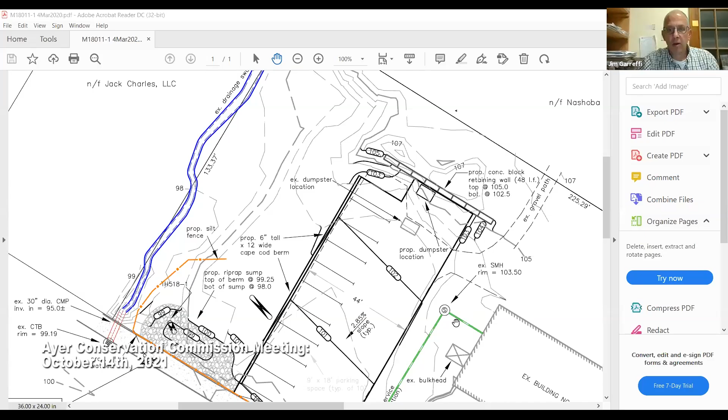Share, okay, so can you see the plan? Yep, great. So this is the little brick building down on Central Ave, our office building.

And we have this gravel parking lot on the other side of us that is just horrible as far as trying to maintain in the wintertime. There's a big pile of dirt behind our dumpster, it's all the dirt we've ever put on that parking lot to try to level it out. Every winter it gets plowed up and put in the back. The other reason is we get puddles in areas, the trees are shading over the parking lot, we're trying to make a safer parking lot. And right now, when it rains, the water ends up right down on the road here, so we're trying to accomplish a whole bunch of things.

One is we'd like to pave the lot so we could treat it better, plow it more efficiently. And then hopefully try to take some of the water that's running off our current parking lot into the road and get it into this little dip area here, so anything in it may be able to settle out before it gets to the catch basin. Right now the water comes down, goes along the curb and ends up in that catch basin. What we're trying to do is give it a place to go before that, to minimize some of the issue on the road, any of the dirt or whatever's coming off our road too. So that's really what we're trying to do, pave our existing parking lot.

And also, you're going to create that little retention area? Yeah, that would be part of this, putting this parking lot in there would create this little riprap retention area. It's about a foot deep.

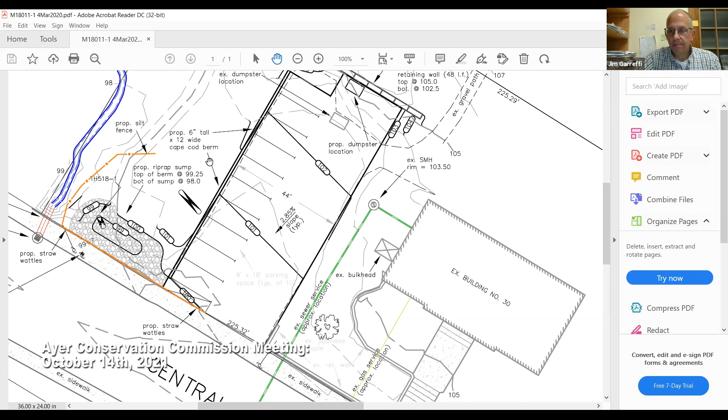And where on here are the buffer zones? The intermittent stream is shown in blue to the left, and I scaled it out today. It's just about exactly 50 feet from the intermittent stream to the left-hand edge of the proposed parking lot. And the proposed parking lot is about 50 feet wide, so the 100-foot buffer is just about at the right-hand edge of the proposed parking lot.

So that riprap area is going to be well within the 50. Yes. Okay.

Again, one of our thoughts, and it was certainly open to discussion, is that right now all that water runs from the parking lot right into the catch basin, it comes right down that gutter line. We figured having this area here might actually be able to provide some settling before it hits the brook.

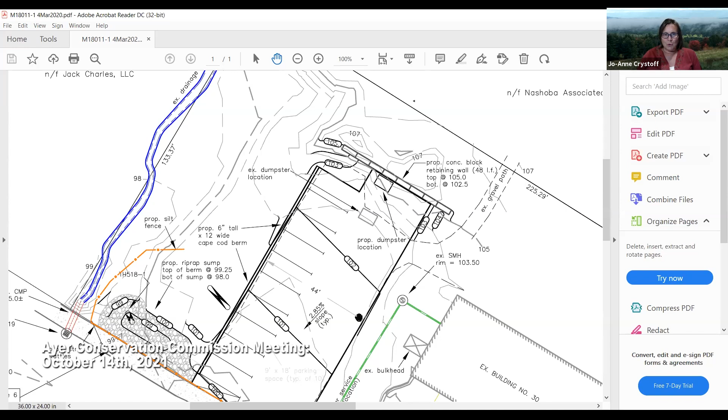I did talk to the town planner about this today because the Conservation Commission is not the stormwater authority in Ayer, the planning board is. Mark is going to have to go through the new updated stormwater regulations to see if this might need a site plan. He wasn't sure, but he's got a copy of this plan now.

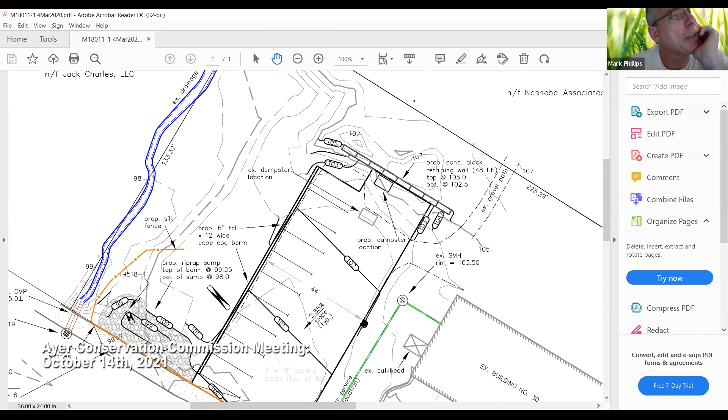You may have to do a concurrent sort of thing with the planning board, depending on what he decides. Jim, regarding the pitch of the whole parking lot on your plan, is the expectation that it's going to be coming towards the road but at the same time pitched down towards that riprap area you're proposing, or is only a portion of the parking lot planned to be pitched that way?

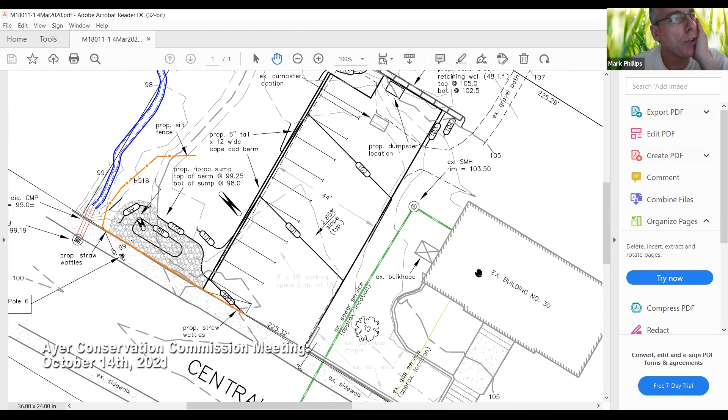I guess going forward I assume, Jon, you're probably going to want to do a site visit on this too. But Jim, if you could be sure to change the designation of the intermittent stream to actually say intermittent stream, that would be much appreciated.

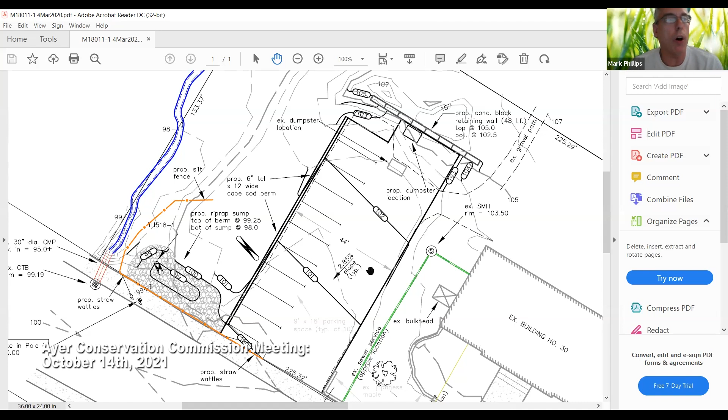And right now it is basically gravel and dirt, if I remember correctly. Yes, correct. Do you have a lot of runoff now, or is it percolating down through that generally? Is it only when we have a heavy deluge of water that it's actually streaming down? When we have enough water that the puddles form, since it's not as level as we'd like anymore, as those puddles fill, it runs right down into the street. It's pitched that way.

Can you tell me, Jim, in the back where it has that proposed concrete block retaining wall, it's less than 4 feet here, right? Yeah, is that 3 feet-ish? Yeah, about 2.5 feet top to bottom. So from here to here would be 2.5 feet, and the grade goes up behind it.

Right now the dumpster's about here and it's in the way of some of the parking, so the plan is to cut that back and get the dumpster out of the parking lot.

Any other questions or comments from commissioners? From anyone viewing or listening?

Jim, we have a couple of site walks set up for next Tuesday. Would that be possible for you and the commissioners involved? What time did you set that up? About 5:45 - is that going to be getting dark? Not yet, no. So Tuesday's at 5:45? Would that work, on the 19th? Yep, okay, that'd probably be fine.

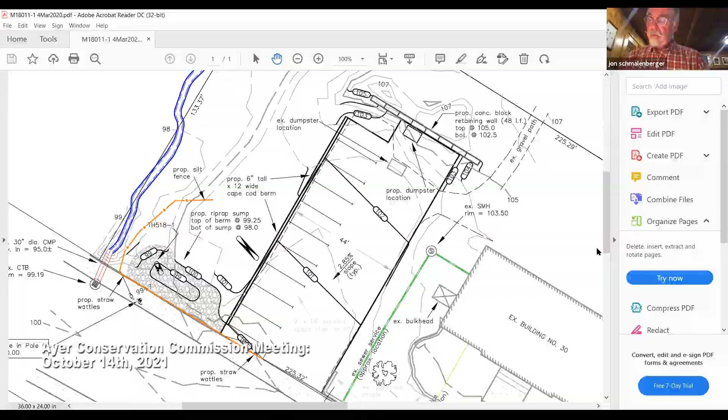Next item this evening is a public meeting that we will open under the Wetlands Protection Act and the Ayer Wetlands Bylaw. It is a conservation analysis of Stratton Hill. No, we amended the agenda - we're just going to open and continue. Well, it's just a public meeting, so it's just postponed. Okie dokie, let that one go.

Our next item this evening is a public hearing that we will open under the Wetlands Protection Act and under the Ayer Wetlands Bylaw. It is a notice of intent at 0 Washington Street, Lot A, DEP file number 100-0461.

How are you, Joe? Fine, thank you. Good, good.

Have you received the orders of conditions for Lot A? We got the drafts, Joe, and made some comments on those. Yes, we got those. I apologize, I misunderstood.

And you had time to review those? Yes. Any comments or questions? We provided Jo-Anne with some comments. One or two things were typographic in nature. The form didn't seem to be populating the file number up in the upper box, the DEP form, and there was a couple of other language items, but pretty minor stuff on balance. I don't know if Jo-Anne had an opportunity to

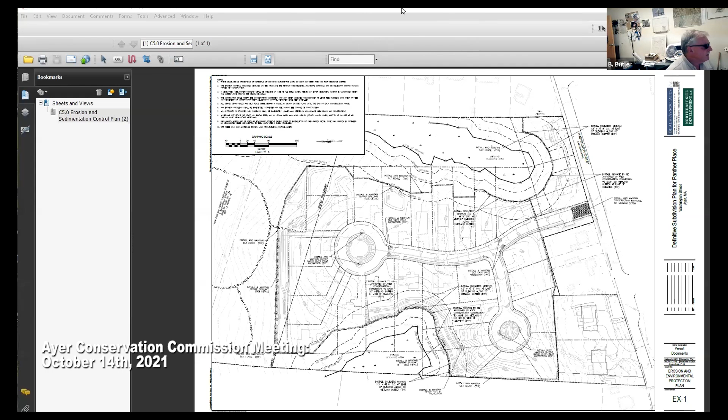Maybe it's over here. Just a second. There it is. Can I share the screen, Joanne? Jen, are you all set for him to share the screen? Yep, it's still on. Okay, yep. So I want to share screen. Let me see. No, let's see, share screen. Can you see the site plan now? Yes. Great, okay, we're halfway there.

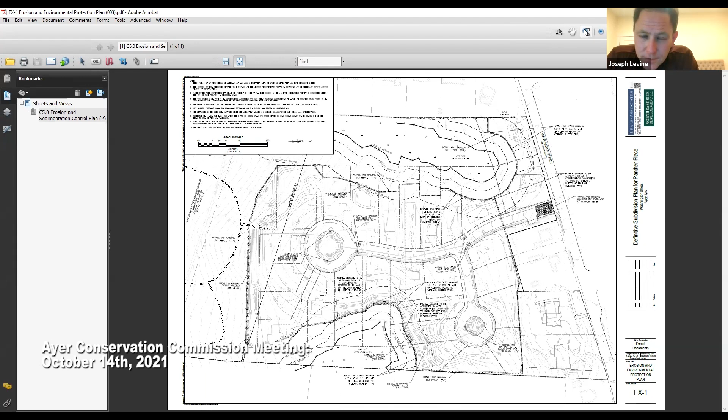The question from the chairman was prior, what do we want to do. Exactly. We have the 13 lots that are jurisdictional, A and B here, if you can see my cursor. Brian, you should probably zoom in a little bit. Okay, yep. That better? Yeah, for the viewers. So A and B we've checked off, they're again from the shared parent property, so those are no longer in play, or at least in terms of the public hearing process. Then we have lots 1, 2, 3, 4, 5, 6, and lots on the other side that are buffer zone only.

Some of these are grading, and some of these are building structure within the 100-foot but outside the 50-foot. The plan's been annotated here, this is the erosion control plan, slightly updated. It shows the boulder placement at the 50-foot per the discussions on lots A and B, and implicitly on these lots with the commission.

It also shows iconography of a continuous silt fence that has been installed out there for turtle exclusion already to date. Even though the icons look blocky like a hay bale, there's actually no hay bales specified here, there's reserve silt socks as needed. The entirety of the project, both upland, wetland, or upland buffer zone and non-buffer zone, has been sequestered with the siltation fence installed by S&M Farms, and as you know they do a very good job of that. That'll be the primary erosion control and limit of work definition, and also serve as a turtle exclusion barrier for the remainder of this month, as well as beginning next April through the 2022 growing season.

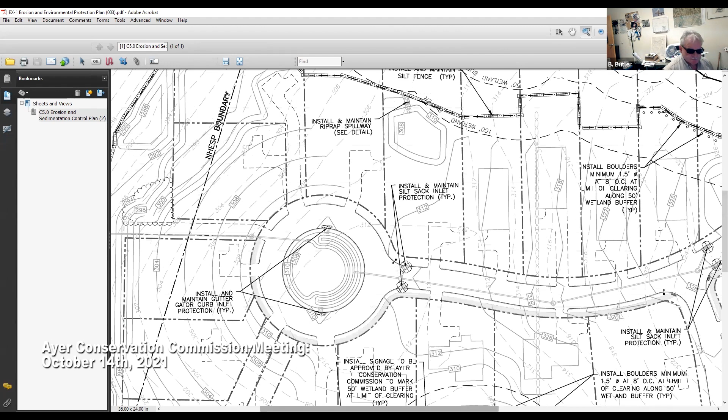We don't want to have to fix something after the fact here. So this will simply take the place of the existing EX1 erosion and sedimentation plan that's in the plan set now.

Virtually nothing else has changed on the subdivision since the prior submittal, right, Joe? Correct. Minor tweaks of aligning the erosion to the clearing limits, very, very minor. But this will be the prevailing plan.

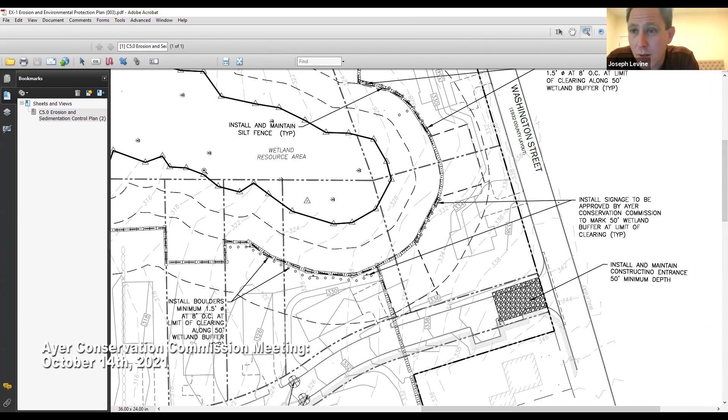And that's why there's literally one roll on the job site. And as we work through it, everybody knows what's going on, as opposed to handing somebody a separate document, which can present problems for logistics of where that document is.

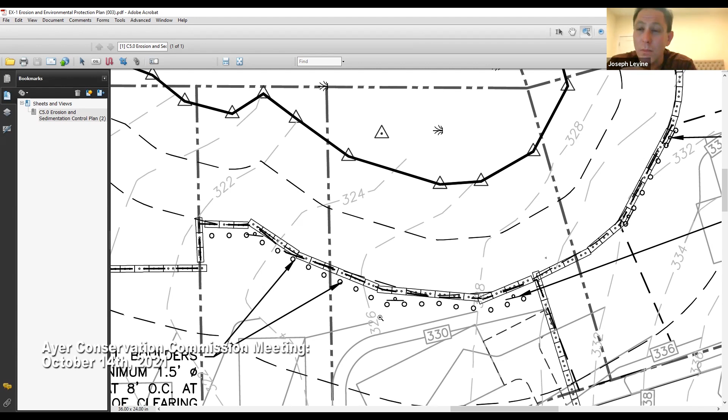Joe and I have both been on projects where the plans slip through the cracks. Somebody's, even though they're supposed to be on site and everybody's supposed to have copies, it just doesn't happen, and we'd rather avoid that potentiality - this is an easy solution for it. Everybody, if they have any other comments, all the information's in one place, one document that can be referred to.

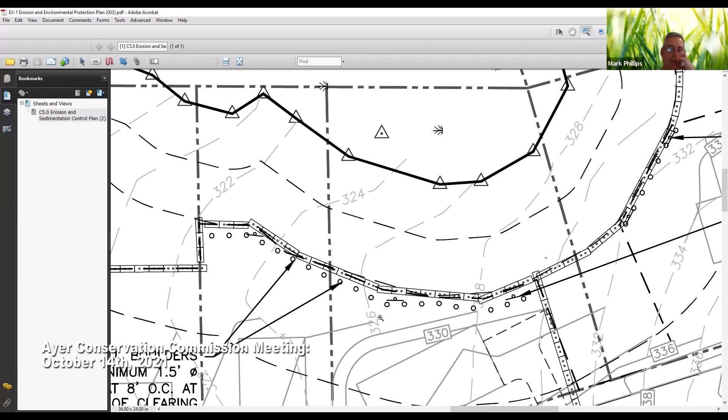Does anyone have comments about this? So lower left corner, I see the boulder size. I thought when we were out there, didn't we discuss they'd be 2 feet, not 1.5 feet minimum size? And that's what it says, right?

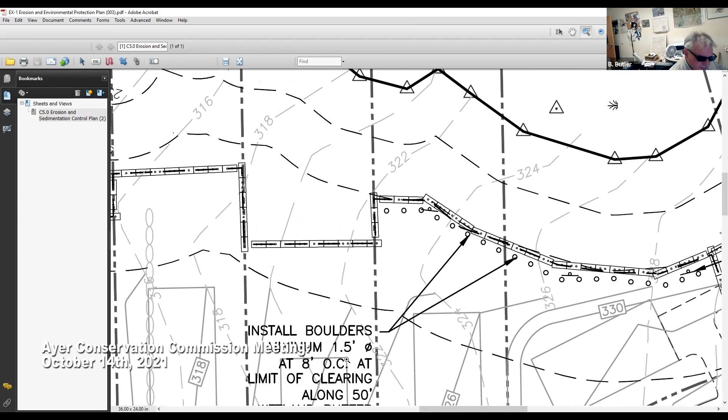Install boulders minimum 1.5 foot diameter, 8 foot on center, at the limit of clearing. No, what I'm saying is I thought we said not 1.5 foot, but actually 2 foot minimum diameter. Did we not? Maybe I just thought that in my mind, but I thought we had talked about it.

That's fine. What I already know is what's out there, and the stuff out there is bigger than 1.5 feet, so that's no problem. We can change it to 2. Yep, the bigger the better.

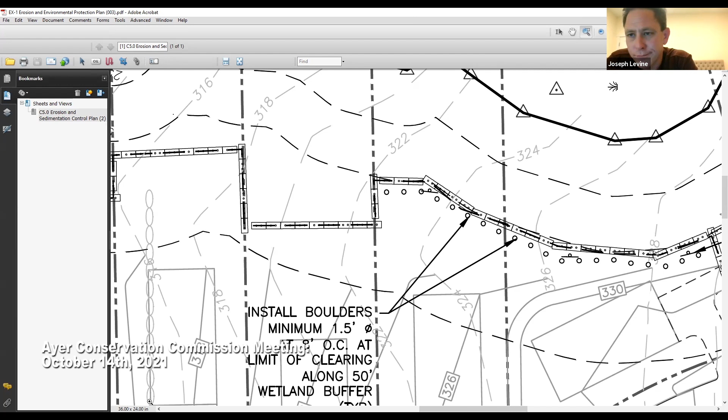Well, if you look over, there's an old stone wall that was there - it's actually on the left side of your screen right now. So that old field stone wall is what we're going to be using primarily, so there's nothing there that's under 1.5, 2 feet. Those weren't hand placed boulders, those were dragged by oxen or something.

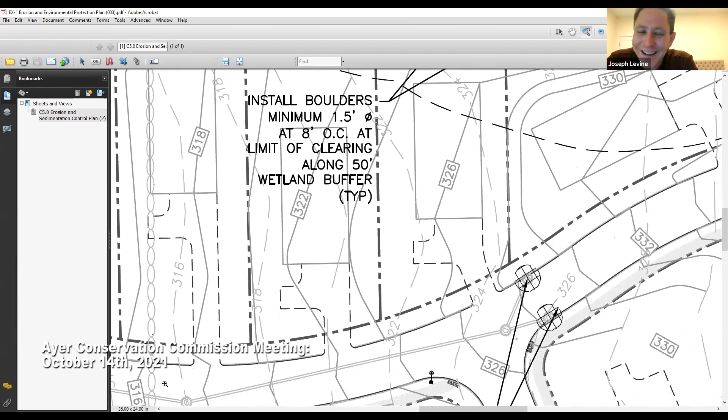Yeah, you got to be a pretty big dude to move those around. So no problem, you want to change it - this is why we're here. If you want to change it to make sure that's minimum 2 feet, no problem. No problem at all. Yes, please.

Yeah, because like you said, you're not going to be on site all the time. So whoever's doing the work, I want to make sure they'd say, well, the plan says minimum 1.5 feet or whatever. That's exactly why we're here right now. So if you prefer saying 2 feet, we're going to say it says 2 feet.

We're going to be sending Joanne out there every other day with a caliper to measure them. All right, fine, as long as she can lift them, that's fine. She's going to take a big caliper. Yeah, no problem, 2 feet - again, I know it's out there, the stuff over there. It's not a problem, so we can say minimum 2 feet, no problem.

I'll get that note to Ben tomorrow, Joe. Or I can make sure, just so I can make the plan while it's still fresh. A plan change, sure, no problem.

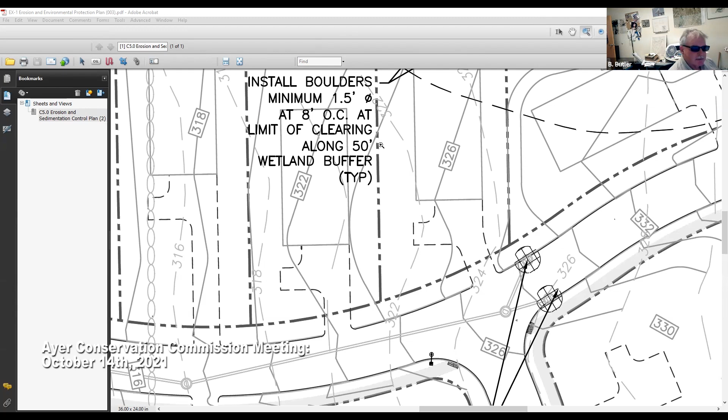So on lots A and B, I think the boulders were also closer together than 8 feet. Or were they? I don't have the extracted plan here with me. I think I do. Let's see, I think we may have said 6 feet. I just closed them, it should be here. And if we did, we'd want it to be the same.

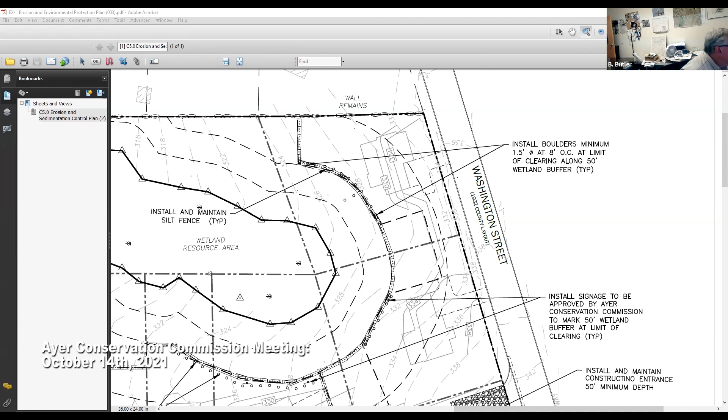Let me go to history in Adobe. There we go, is that on screen one here? Can the commission see that? No, this is still, I'd probably have to do something with the sharing again. Just drag lot A or B over to the same screen. Here we go, new share. Even though it's on screen one, now I think you can see it. Yeah, now we can see it. Can you zoom in on that? What do we have there, what do we say there?

1.5 at 8 on center. And I think we'll voluntarily make that 2, you know. Yeah, it's all gonna be on the same sheet. But if it gives the board a comfort level that we go 6, it's fine.

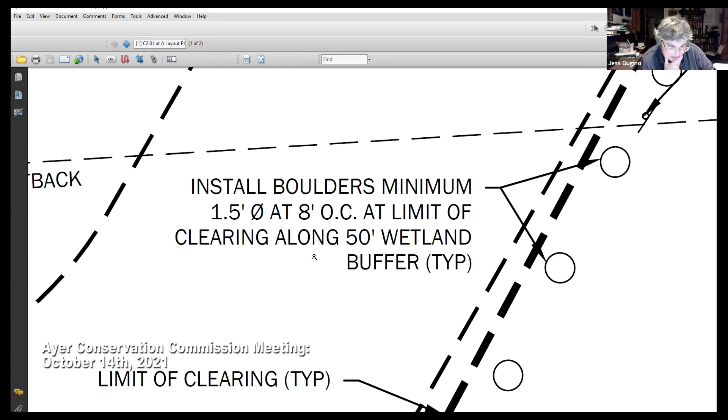Looking at our minutes for August 26th on Lot A, we had discussed at least the boulders be at least 2 feet in diameter and spaced 6 feet apart. Okay, so that was what we had said on that. Thanks, Joe, no problem. So if we can change that on A and B, and then the other thing you were just showing, that'd be great, no problem.

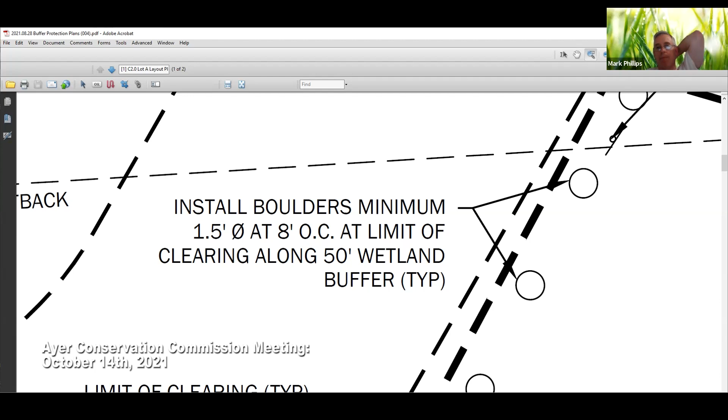We're still not gonna run out of boulders, yeah. No, and 6 and 8's not gonna put me out, so we're fine.

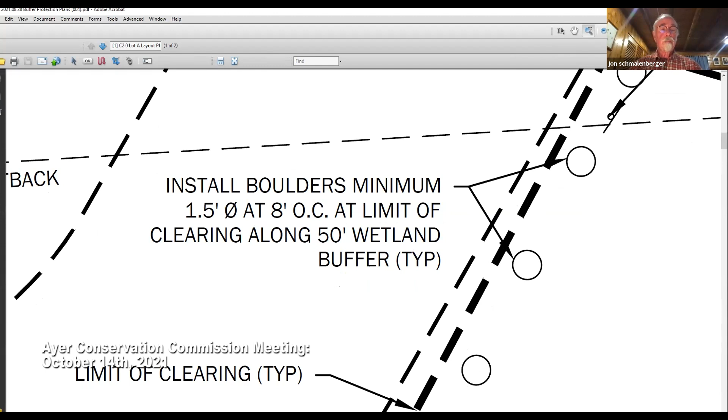Anything else with this? I'm gonna close this, I think, and we put a note on there that the sign location is to be determined by the commission. What was that, George? Sign location to be determined by the commission.

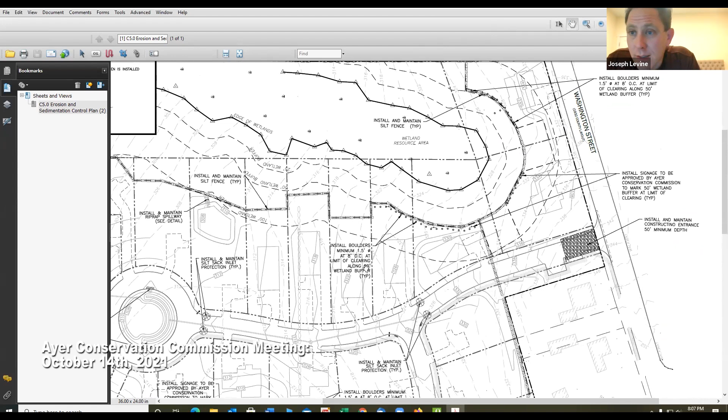Well, I think that's what we were trying to do now, is that the commission wants to make comments on the plan of where they want the signs, and we'll show it on the plan where the signs will be. Well, you really can't tell looking at a plan. I think it's best to be out there and get a better idea of where the best place is. What we might do, just to logistically not tax Joanne's time, we could have a numeric number of signs and put dummy positions up there and maybe do a singular walkthrough with Joanne if she agrees that the placement is good, rather than do it on a piecemeal lot basis.

I don't know, that's fine. Because we don't intend to skimp on the signs or to try to dodge that obligation by any means, but we don't want to have 30 signs on each lot. Right, but I think hopefully the boulders will stand alone as a reference point, and the signs will just be kind of backup for anybody curious enough to go poking. Many of these are going to be moderately distant from the houses.

There was one location where you've got the sign right in the back corner of the lot rather than in the middle, so we may want to consider moving it more towards the middle of the lot. In this example, you mean? Yeah, because we have one here, then one here, we thought. But again, we can field adjust those. As long as we do it before the post goes in the ground, that's not a problem.

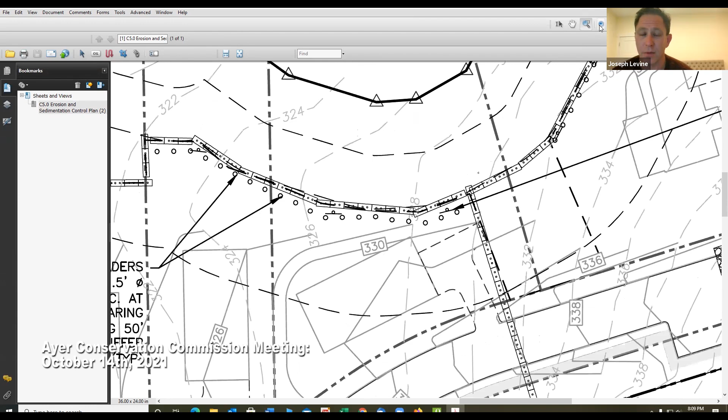Does it say typical signage to be approved by the Conservation Commission? I think that already gives coverage that a sign needs to be bona fide or endorsed by the commission before it can be a permanent feature.

When do you anticipate putting the signs in? Maybe Joanne can agree or disagree with my thought: would it be as simple as when we're finishing a house and I call Joanne for a final inspection, and at that point she tells me where she wants the signs, and we put them right then and there, 3 signs per lot or whatever it's gonna be.

Yeah, that's kind of what I was thinking. That's what I was concerned about, because it almost sounded like you wanted to put these in now, and it just didn't seem quite right yet.

No, it's more just a reference that on the plan we should know that in the back of this lot there's gonna be 3 signs, locations to be determined by the conservation agent. I wasn't thinking it through that a lot of the work is conjoined, but the individual certificates of compliance are gonna be one by one, rolling on the dial, so it makes sense, as Joe just said, to do it as a last stage.

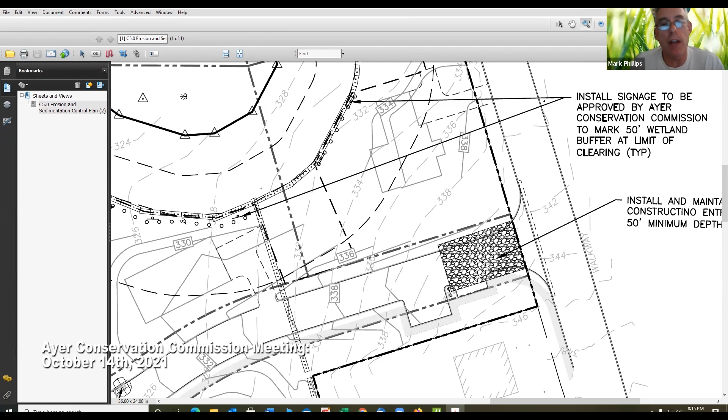And I think all we're looking for is that we'd like something, be it at the road or at the final location, prior to the lots being marketed.

Okay, yeah, you know what I mean? All right.

What I would probably wind up doing, once I pour a foundation, if I needed to measure off something, I'd probably put them out around on that so we can figure it out.

This is not... right, as you said, it could be garish sitting out at the road as it's coming in, just as you'd have your DEP file number sitting there, you'd have this thing that says, lot subject to order of conditions, wetland order of conditions and such.

Well, we had talked what seems like years ago about making what I referred to as George's sign, a yard sale type sign that would go on the street in front of one of these new houses, saying that, in addition to the DEP file number sign, which if you don't know what that is, you don't know. We designed this other sign that said this property is under an order of conditions with the Conservation Commission, which again, if you don't know what that is, you don't know it.

I think we're getting a little into what other problems have happened, because not all these lots are really working within the 100-foot, and then there's a huge boundary of woodland before we get to the 50. So they're like any other property owner in Ayer, where you can't just do what you want all the time.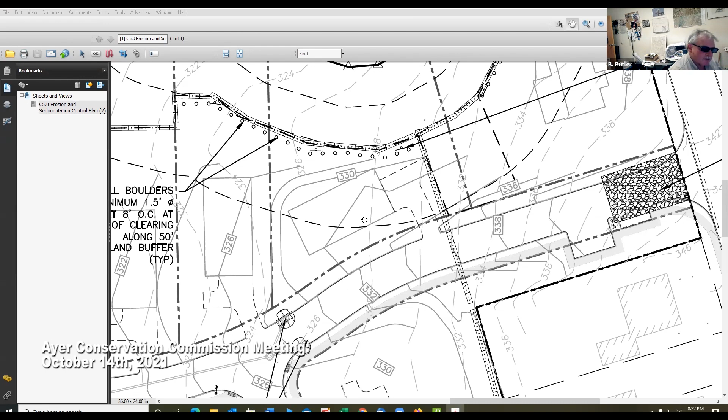Which should be a simple thing for the engineers to do, to make it so that there is—they'll just extrapolate each lot separately. For scale on that, since they're not that large when individualized, is a tabloid plan more preferable, or do you want a full 10 scale? It'll be a 10 scale if we do a 24 by 36 for a single lot. 11 by 17 would be perfect. Great, okay.

And if you could also have the engineer color it up so that the wetland resource area is blue and the two buffer zones are some other color. Yep, we can do that.

It's the future homeowners that I'm thinking of here. And it's not the commission's mandate to be enforcing wetlands violations—well, I suppose that is one of their mandates, but this is a more educational kind of commission. So if you can start that process by educating your buyers about the resource area and their responsibility, and also let the real estate agent know, so the realtor can have one of these plans in the marketing packet for each lot, half the work is done.

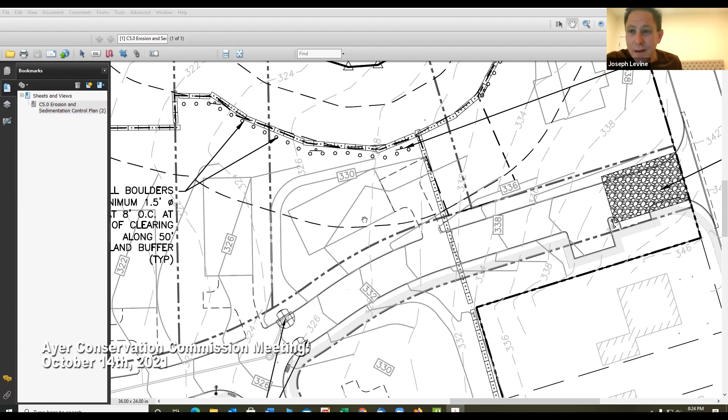Well, Jo-Anne, I'll make it easy for you because I'm the one who sells these, so it's taken care of. Well, if that is the case, Joe, then we should work together to put together some kind of little information packet. That would be great, because it is a beautiful piece of property, and the resource areas need to be protected. And we do that by educating the homeowners.

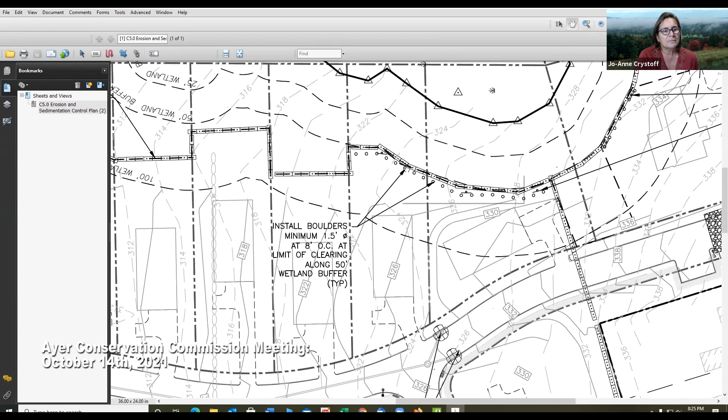The other thing I would like to see, commissioners, is more signs—not on the lot we're looking at, but a lot that has buffer zone on it. Let's zoom out. So we have lots 1, 2, 3 here. We don't have signage because of the remoteness—this is the 100, this is the 50, but the work ceases at 70, thereabouts. But that homeowner is going to be the one who takes their leaves all the way back and dumps them in the resource area, unless there's a sign right in the middle at the 50.

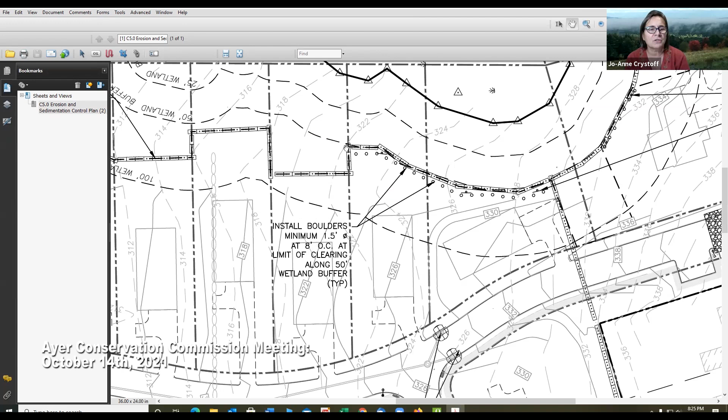Do you agree, commissioners? 100%. Well, they will. That's fine. Wherever we're in the jurisdiction, we can put this sign at the 50.

Yeah, I think, because if somebody's gonna have the opportunity for a bigger yard, that means more grass clippings and more leaves and there's that nice wetland resource area. Let's put them there.

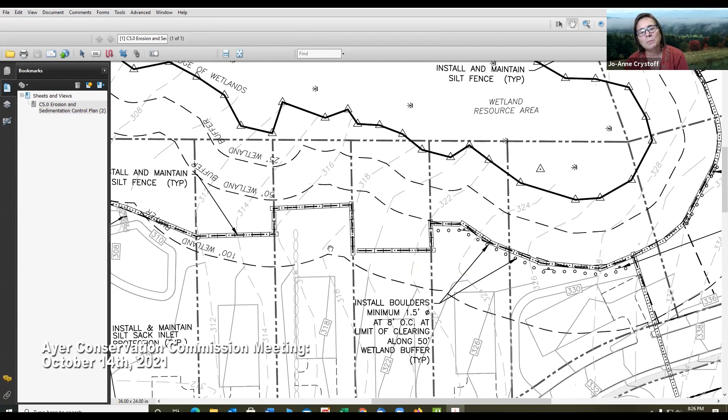So that would be my recommendation, commissioners, is to ask for a sign at the 50 on all of the jurisdictional lots. I think it sounds fine. Makes sense.

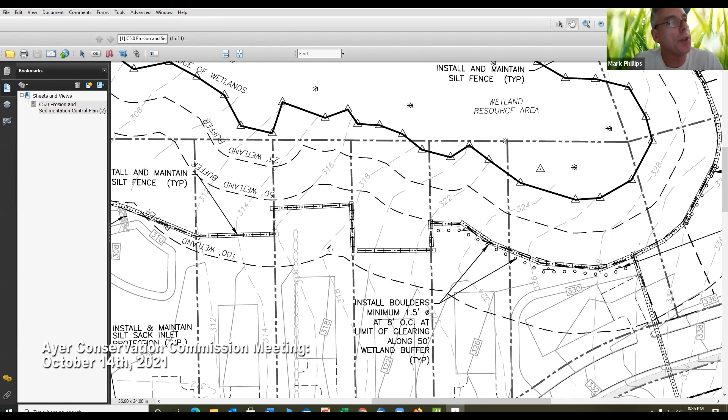So as we said, lots 1, 2, and 3 will be indicative of how smoothly this will go. We'll use that to bang any of the dents out, I hope, in this process, so that the rest are easily managed on our side and your side. By the time we get done with lot 3, we should have this all vetted pretty thoroughly, at least the process.

If I count them out properly, it looks like we've got 3, 3, 3, and I would entertain doing 4 on the last one, Jo-Anne, if you're okay with that. Yeah, by then I should be doing this with one hand tied behind my back, right? Maybe we can have that assistant type these up beforehand.

Oh, do you have some staff anticipated? We're trying. Yeah, we're hoping.

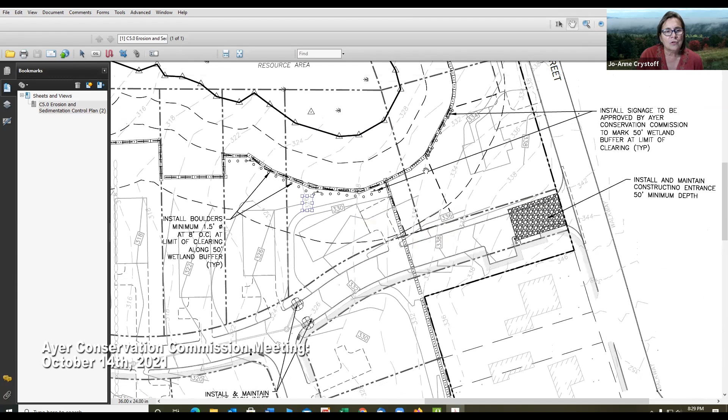And just to take one final look, Brian, could you zoom out so we could see where else the boulders are proposed? Would it probably be better to tour? Give us a tour.

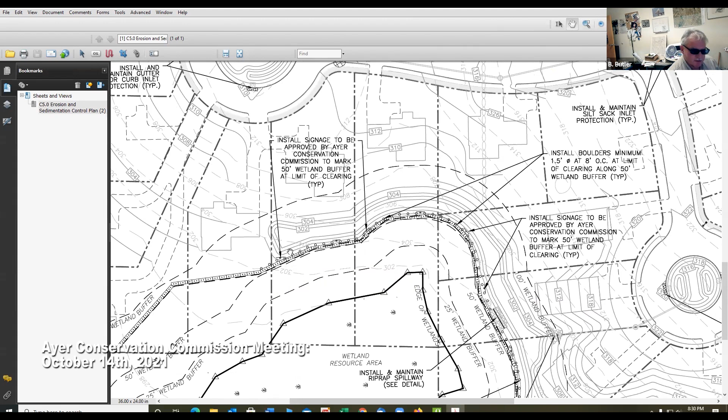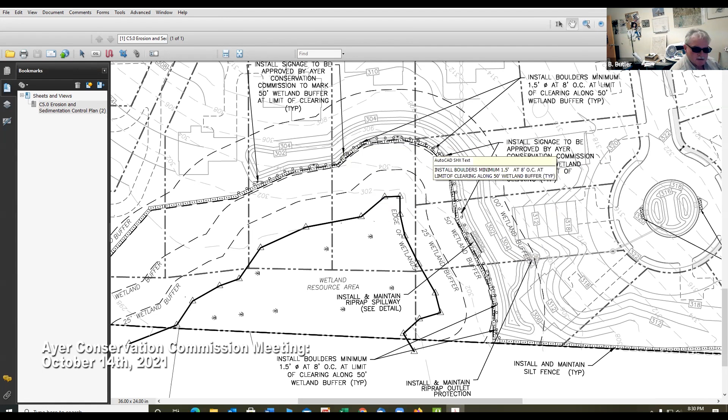So we have boulders. These are the ANR lots. We have boulders on lot 1 and lot 2. We had skipped them on these lots because of the offset. We have boulders on, actually this isn't numbered here, I believe this is 14 or 15 and 16. Was that 14, 15, and 16? Yeah, this is 21, 9, I think that's 19, 18. This one really doesn't have, actually this one's outside, or doesn't have any 50-foot on it, rather. So we have partial boulders here, 1, 2, 3, 4, 5 lots here, and then to the north side, we have 2 lots. So we have boulders indicated on 7 of the 13 lots that are subject.

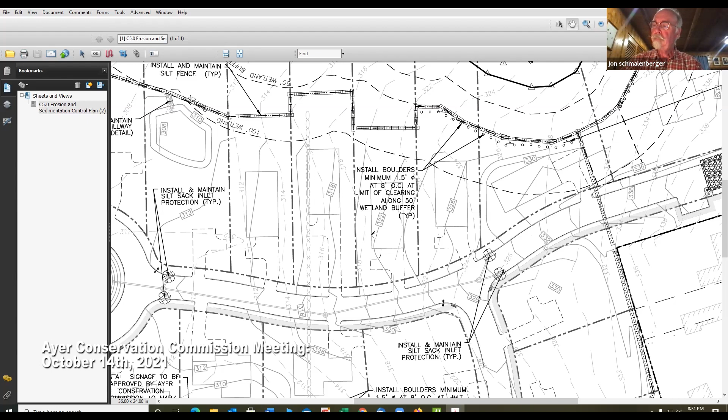Yeah, as long as we phrase it right, I think it's a good idea just to raise awareness. We don't want to spook potential buyers and think they're buying into some huge liability, but we do want to raise their awareness. And I think there's a way of skinning that rabbit that we can come up with that makes it clear that this is a consideration, but it's not a tremendous liability. It's not atypical at all in today's market, all the dry sites are long gone.

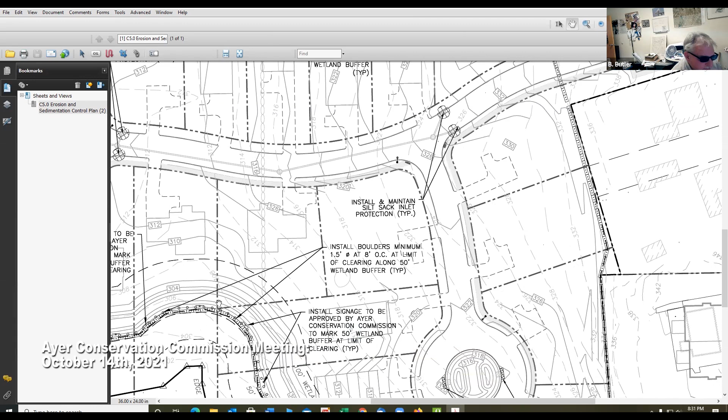Brian, could you go back down to the bottom to the other lots, the one you said was just outside 50. I'd like to see a sign right at that corner. What kind of sign, Mark? Just our conservation sign, because essentially that's the 50, if I'm not mistaken. Yeah, that's the 50, it's just so close to where, a foot here or there.

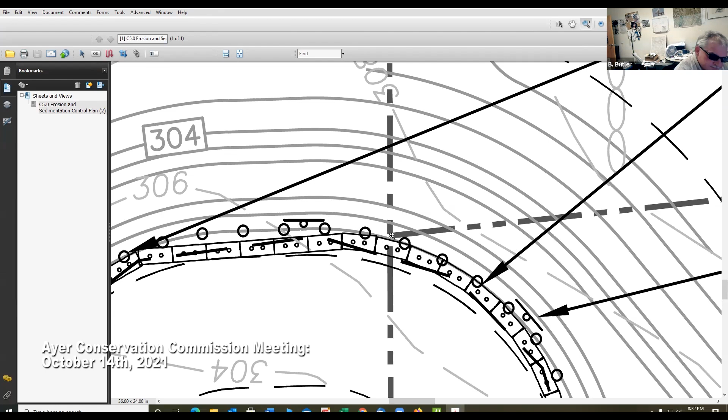I just want to make sure that property has a sign on that very corner. Yeah, we can certainly push these a little bit and put one right here that would serve for that lot. That's okay, but between which two lots, just so I get this right in the minutes, which two lots is that between?

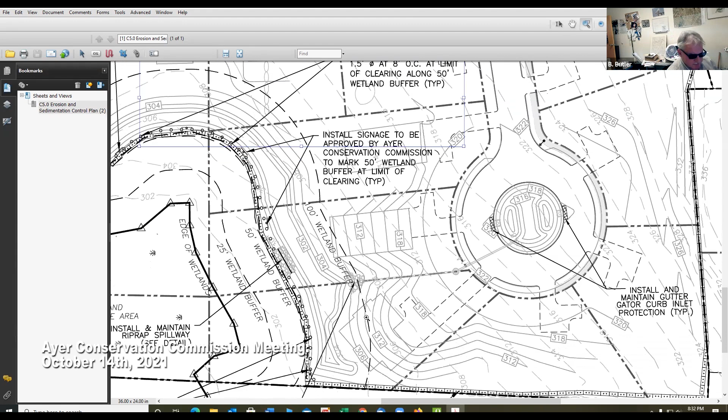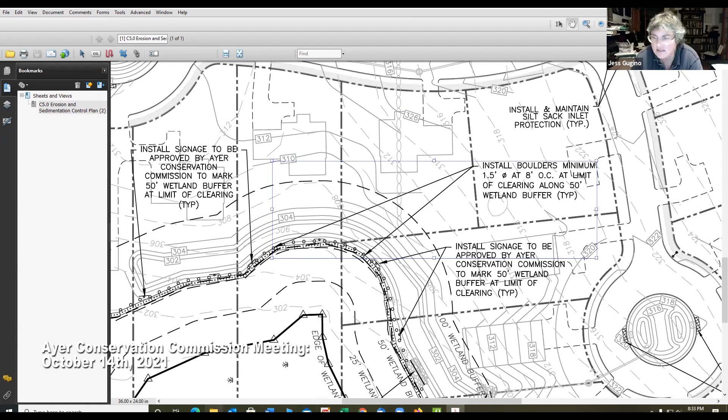19. Yeah, probably 18. I'm thinking it's right between 17 and 19. I believe you're right, but Joe can confirm that real quick, because 18 isn't part of our jurisdiction. It is lot 17.

Just that corner right there, that's 17. No, okay, not that one. No, this is 18. This is 17, 18. Yeah, 17 is to the left of it. This one's not jurisdictional. That's right, 18. Yep, 17 is here. 17, yep okay.

What is it cornering to? What's the lot it's cornering to? It's cornering to lot 19 and 16. Okay, again, no problem.

So again, maybe when we work our way around and get to this lot, and we have the zoom in of the lot plan of just that lot, then we can call out a sign in that corner and things like that. That'd be good. No problem.

What we're trying to do is just make this thing easier for homeowners and us in the future. That's no problem, we appreciate it. And as long as everybody, the homeowners, play the right game, they're gonna love these properties, they're gonna really enjoy it.

Yeah, we think so. So if we could just ask you to legally post the 1 through 3 on the next agenda, and continue. Well, actually, no, because it's a single notice, each needs to be managed from a posting standpoint. You know what to do, Joanne, but we want to have 1 through 3 legitimized for next meeting. Yep, three legal ads, abutter notification.

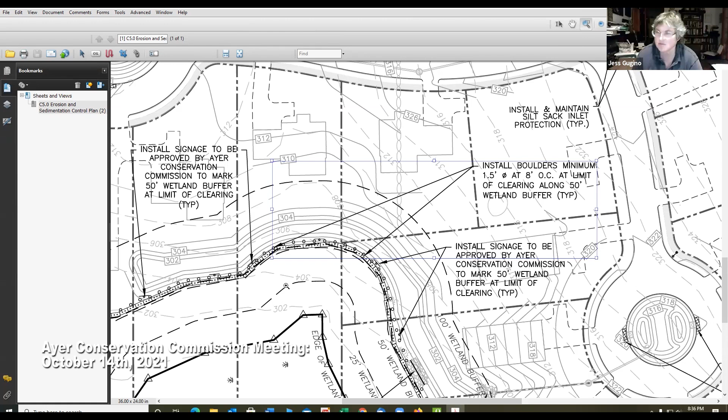Well, I'm gonna have to double check on that, and I'll get back to you guys early in the week. We have to see what DEP would allow. Yeah, hopefully they would allow us to not have to do that. Or maybe we put in one more set of abutter notifications for all 13.

We open all 13 at the next meeting and just continue them, don't talk about it. Let me sort through that and I'll get back to you. I'll research too, because I thought our notification obligations were complied with, but it's been a couple of weeks, several weeks, and I can research that too, Joanne, and feed you whatever information I have. Yeah, and we can compare notes.

Jen, how are we doing on time, Jen? I can't see you. 8:37, so we're okay.

Anything else? We ready to move on? So what should we continue all 13 to the next meeting? Because we have to continue to a date certain. Yeah, and then at the next meeting we can figure out more specifically what the next three batches get continued to. Right, because this discussion we've been having was the discussion, not the public hearing, right? Right, we haven't even opened the public hearing.